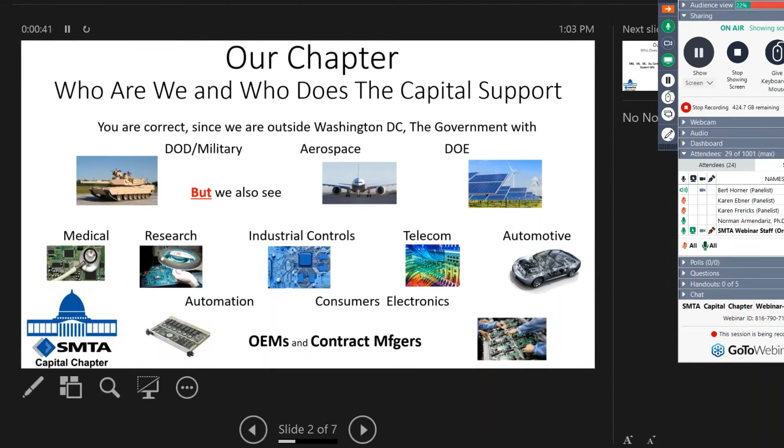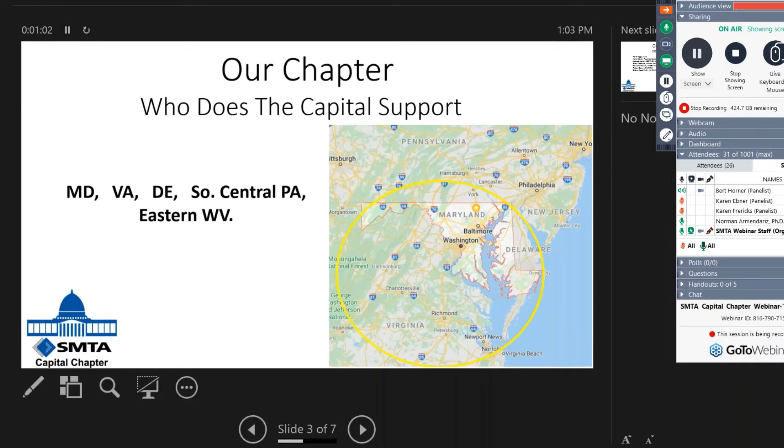Our chapter, who we support, we're basically supporting the Mid-Atlantic area around Baltimore, DC. We get into Virginia, Delaware, Maryland, South Central Pennsylvania, and Eastern West Virginia is our region that we try to support.

We have a great group of officers. I'm blessed to have Katie, Karen, Jessica, Brian, Fernando, Robert, and Banu. It's a nice mix of people that have a ton of experience. I'm really a lucky officer to have 3 past presidents on our staff, a nice mix of suppliers and end users, and professionals that really know the industry and can get a decent speaker. So I am really blessed with that. We have a great sense of pride in the industry and industry insight, and all the officers have a good sense of humor.

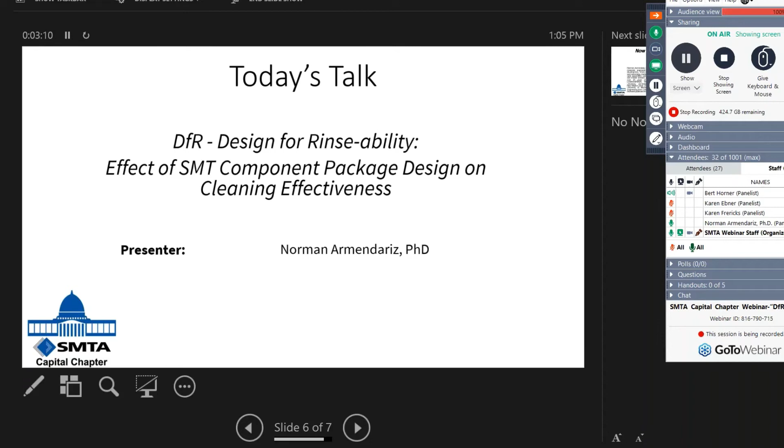A little bit about Norm. Norman Armendariz is an engineering fellow at Raytheon, responsible for material engineering, design, material analysis, process equipment development, micro-analytical metrology development, production support, and technology roadmaps associated with manufacturing of circuit card assemblies used in missile and smart munitions, ground-based radars, and mobile sensors across the U.S. and international sites. Norm has 25 years of industrial experience, has worked for LTV, Lockheed, NASA, Motorola, Intel, Texas Instruments, and American University.

Norm holds an interdisciplinary PhD in chemical engineering from New Mexico State University, holds a MS in material sciences engineering from University of Illinois, and a Bachelor's of Science in Metallurgical Engineering from Colorado State University. He also has 9 U.S. patents and has 29 peer-reviewed publications. So this man really knows his stuff. We're really lucky to have him.

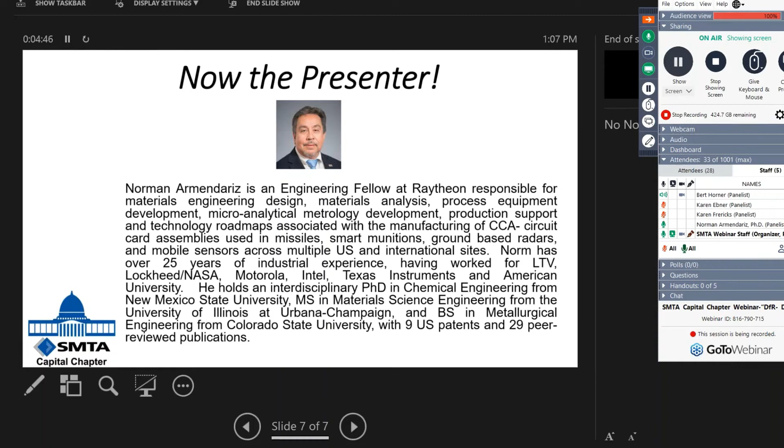Just a quick update for those who may not know. Raytheon merged with United Technologies, so now we're called Raytheon Technologies. And we've also done a number of consolidations internally, and I'm now with the Raytheon Missiles and Defense Group. So, same job, different name, and just different managers.

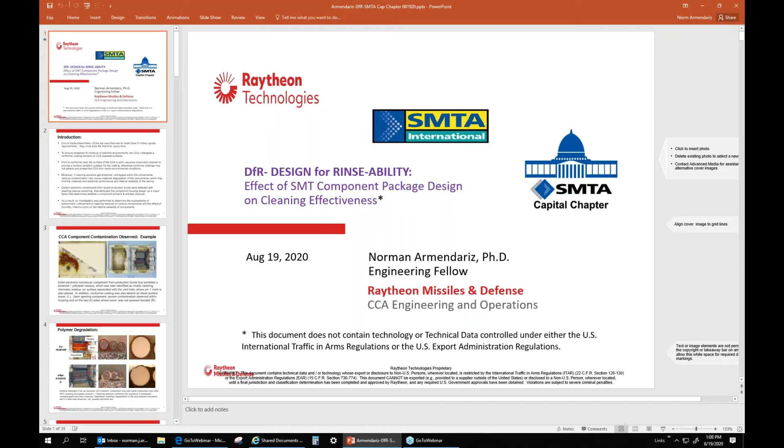This particular presentation, this work was done about 3 years ago, and I presented it at SMTA International. But at that time, we only took it up to the process study. Since then, what's new here is that we've added reliability and thermal cyclic testing, so you can benefit from that if you've already seen this. So let me go ahead and go to screen mode.

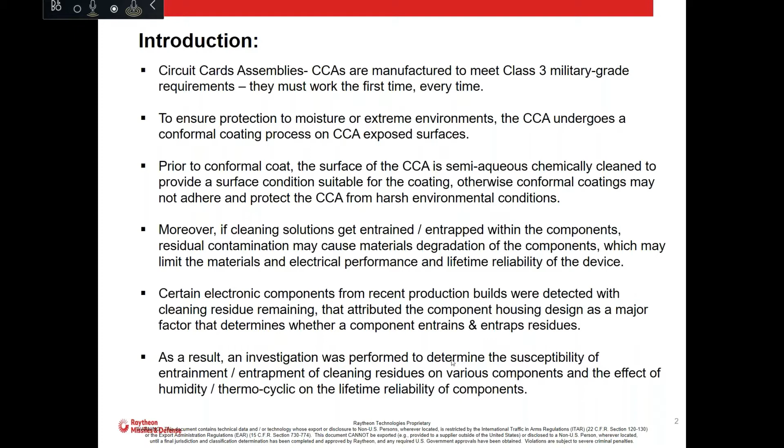So that was kind of a hypothesis, and we wanted to do an investigation, do some experiments to determine, first of all, if this is clean, and if there's certain susceptibility of certain components. And then, as I mentioned, we talked about the efficiency and the effect of the cleaning residue on reliability. All right, so that's kind of where we started.

Okay, took a look at that. Then we did some cross sections here, so you can see the one on the top. I don't know how soon you guys see the presentation, but on the top, it's the as-received part. They didn't do anything, it's a brand new part. This happens to be a little diode with some wire inside of it, wrapping around.

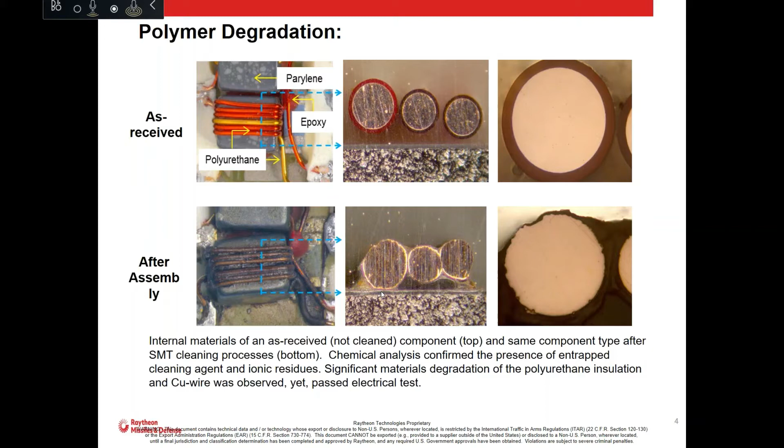Now, the polyurethane in between is still stuck in there, so it still provides some amount of insulation, but you can see that this is on its way to failure. Sometimes you see these things and they're working fine because they're passing an electrical test, but that's why you've got to kind of catch these ahead of time.

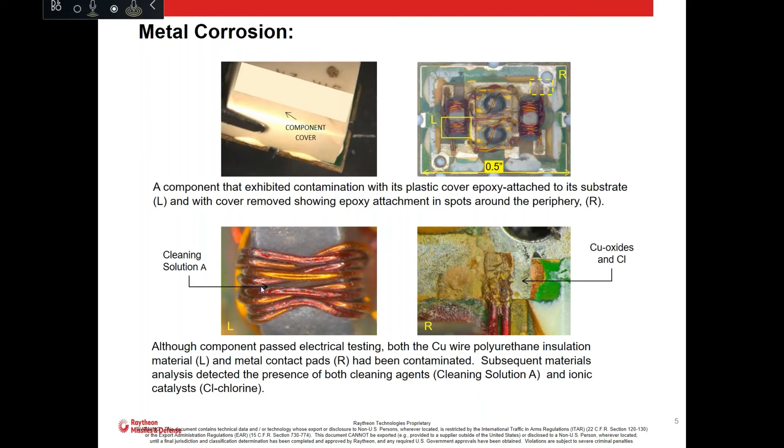We had to form a Tiger team, and there were a lot of components. We had like 500 or 600 on our component list, and that would have really caused us a lot of problems if we had to go look at each and every one.

So we had to quarantine some of these parts, which took us a little while. While we were trying to capture these, we had to do some studies, looking at the most suspected ones and the ones that were failing, saying okay, this family of parts has something funny about it. We need to check these out to see if they're okay.

And if anything was suspected contamination, we submitted it for further study. We also looked at other databases in the products to see if there was a higher risk in the field. So a lot of things were going on at the same time.

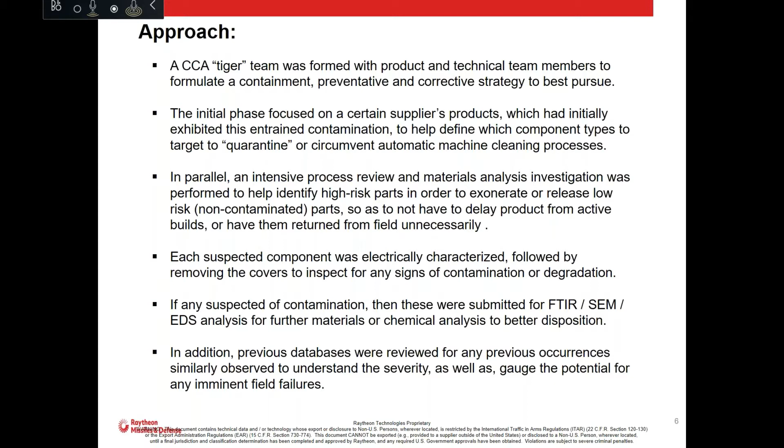So this was kind of our first cut, where we were looking at the contamination rate versus the component type. When we opened some of these suspect devices that were coming in—suspect meaning these were ones being returned, as well as suspected products—we saw there was a whole bunch that were contaminated, and a whole bunch that were not contaminated, all on the right side.

So the hypothesis was, is there something about the ones on the right that are easier to clean? I'm already getting the cat out of the bag here. The ones to the right, marked in green, started thinking, hey, are those more rinsable? Easier to clean, maybe? And why is that? We had to start formulating some kind of idea. What makes them so unique? Why are these not showing any contamination?

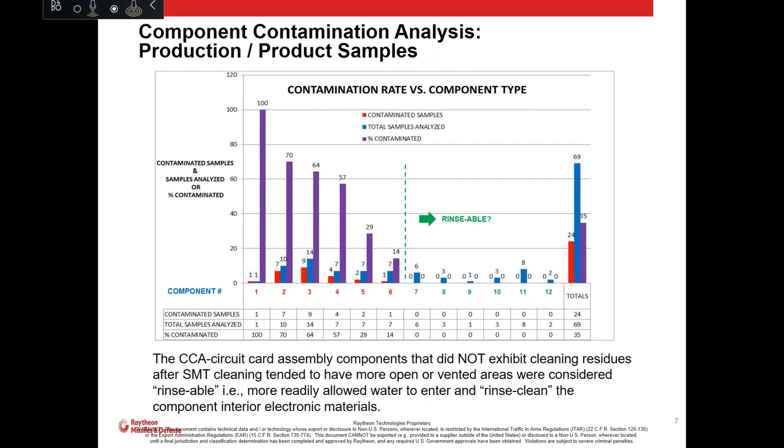So when we started looking at these certain ones that had high rates, we started observing that these component covers—we put them on top, square top, so we can label them on top, and the automatic inspection equipment can see it. You want a flat little top so you can pick it up and image it, make sure the orientation is correct. So it serves that purpose, being able to pick it up and place it, but it also serves to protect the components inside from being hit or damaged physically.

They're usually attached with this epoxy glue around the side to cure it and put the cover on. But it's not a hermetic seal, far from it. There are seams on the opposite sides on this one—they don't put epoxy all around on some of these. Even if you do, that has its own problems, so I'll explain that.

But here's one that has epoxy on two sides, and we opened it up, and where the seam is, we start seeing trails of signatures of contaminants coming in through the seam. Then we looked a little closer, and you can see that the metallic contacts look like they're getting corroded.

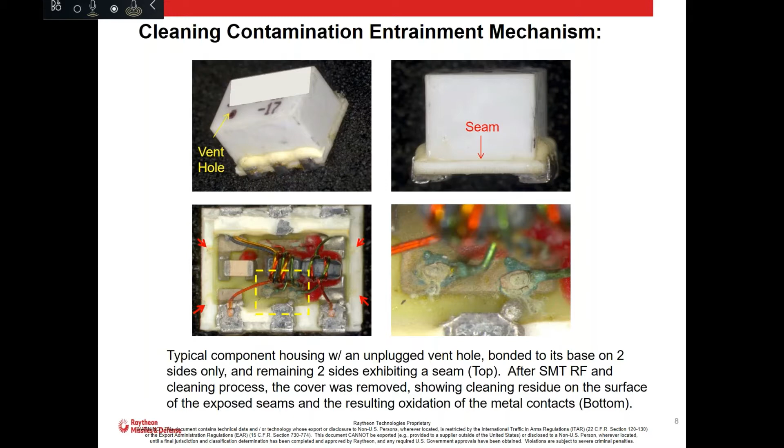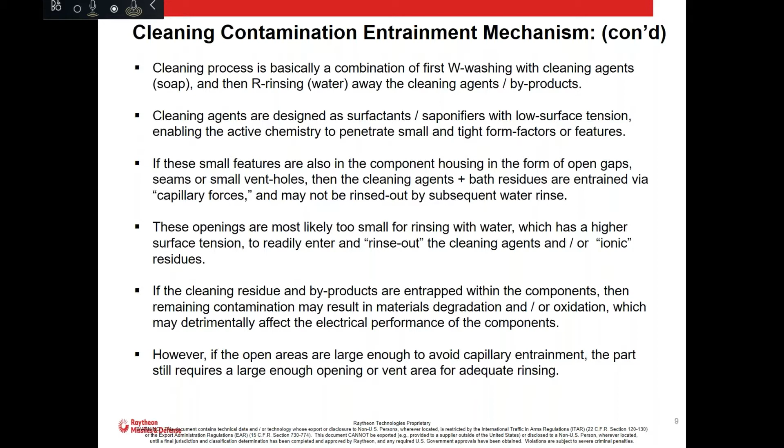So this is the mechanism. Rather than go into reading this, you can read it later. Let me just show you some animation.

There are really two extreme conditions of a component. It could be hermetically sealed with lead glass, whatever—in other words, there's no water or any air that can go in there, very tight seal. We have components like that, very sealed, and they cost you a lot of money. On the opposite side, I have components that are pretty much open, with big windows or big doors, and they're very vented. So those are kind of the extremes.

So when we clean something, we wash it, and we rinse it. Here, not bad—I clean the component with the wash, get rid of the fluxes, and rinse it to take away the dirt. Same thing with the vented open one: I wash inside and out, and then I can also rinse. So those are the two extreme conditions.

But if I have something with very tight vent holes—those little holes, gaps, seams—then what comes into play is capillary forces.

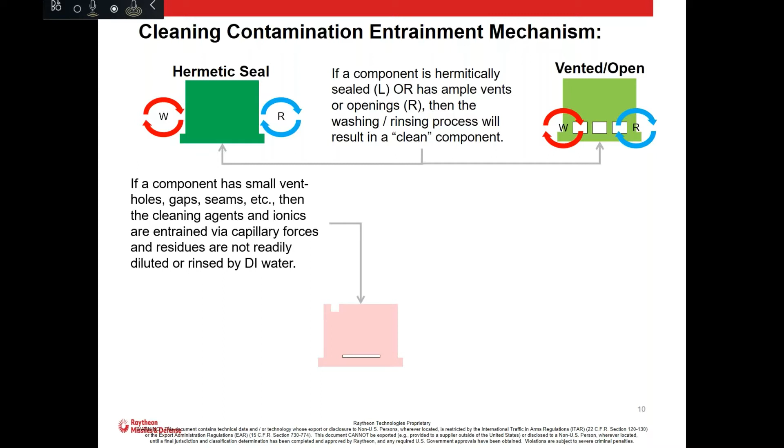So now I'm going to clean this. I'm in a bathtub, if you will, that has bath water, and I have clean agents and ionics, right? Salts and all that I've taken out. I got the soap and the ionics, the dirt, if you will.

And it's an inline cleaner, so when I'm washing, the stuff goes in, and then when I rinse, remember, the wash can go in because it's low permeability, low surface tension, so it gets entrained. But then the water has its own surface tension, as is DI water, and it doesn't penetrate, doesn't entrain, and all it does is just hit the outside. It doesn't go inside.

So what we found is that there's different component housings with different sizes and vents and so forth. We surmise that a minimum size is required for the part to be effectively washed and cleaned, rinsed. So that's why this is titled Designed for Rinsability, not designed for cleanability. It doesn't have to do with cleaning. It has everything to do with rinsing. All right, I want to be able to wash and rinse.

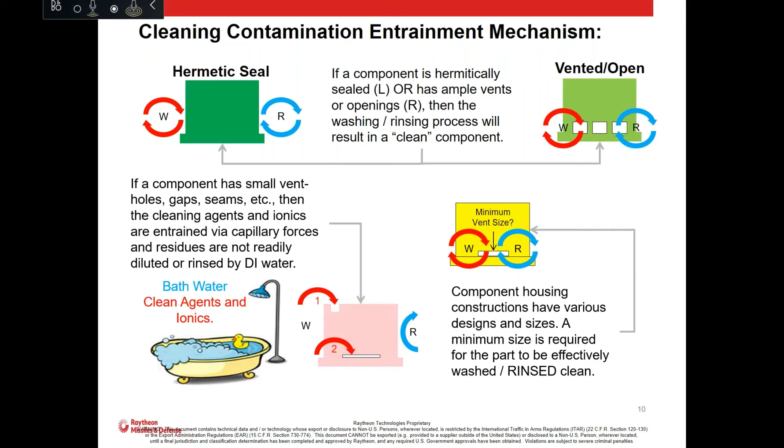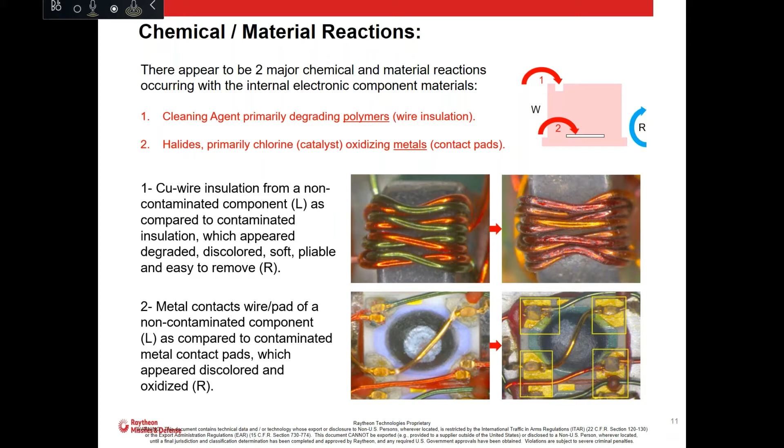Okay, so that was one observation. The second one was that the bath water also has halides, chlorines, all the salts that come off the fluxes and so forth. And the chlorine is acting like an oxidant, as a catalyst. That's why you always have to be careful with chlorine, it's insidious. So here on the left you can see an as-received contact, the wires attached on the base, but on the right, yellow boxes, it started discoloring. Now, again, these are low voltage devices, so they'll probably work to a certain degree, but eventually you're going to see a failure over time, long-term latent failures. If these are high current, even worse. These so happen to be low current.

Okay, so there's all kinds of materials out there that we use. These are kind of representative of what is in our SMT devices, a lot of plastics, polyurethanes, fluoroelastomers, polycarbonates, everything, and metals as well. And there's really three chemistries that we use. We were using chemistry A, and anything that's marked with an X there tells us it's not compatible. This is from our vendors, our vendors tell us, hey, you got to test this stuff.

And for the most part, you can say, hey, as long as I clean it right away and use it really quick, I should be okay. I get into the shower, soap up real quick, and then rinse it off, I'll be okay, right? But if I take a shower and leave that soap on me a long time all day, I'm probably going to start itching, being very itchy that day. So how much time you expose yourself to, for the most part, it's okay if you're in and out real quick.

But if it gets entrained and stuck for a while, that's when you risk contamination or degradation. So the materials on the right tell me that A chemistry is not good for a lot of those, and there's a new chemistry which is much more compatible with more materials. And then C is another one that's used for vapor degreasing, so it also has less risk, you can cover more materials. All right, so you got to be careful what cleaning chemistry you're employing.

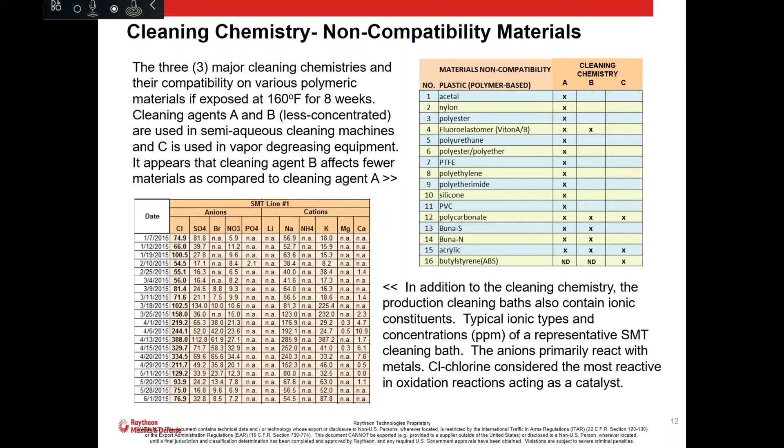The graph below just tells me what my bath water is made out of in terms of anions and cations. So we follow this. This was a study that shows we follow the chlorines, sulfates, bromides, phosphates, and cations. And so the chlorines are the ones we got to watch out for. The anions are the ones that react with metals. The chlorine is very dangerous.

Okay, so how do we go about this? Now that we understand the problem, how do we go about proving this? So what we did, a couple of interns with good eyes, I had them measure 28 different component housing designs from 2 vendors.

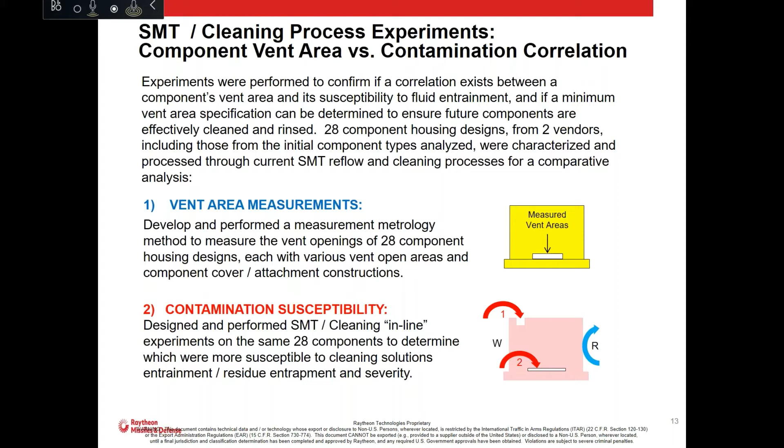And they used a microscope that had area measurements. Then we performed an experiment. We built these same 28 components on a board and ran them through the cleaning machines, then looked at them to see if they had any residue entrapped. So a lot of roll-up-your-sleeves type of work here.

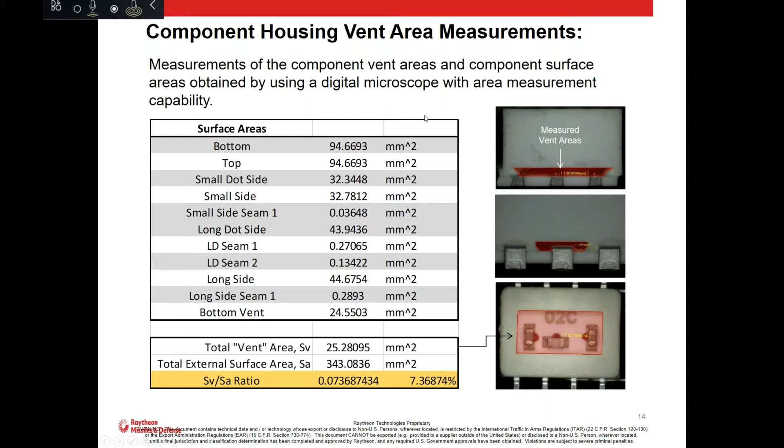For example, we measured the vent area measurements. The vent areas were measured on the side, the little vents. This one had a lot of space underneath, so I just totaled up what area was open, for each component type. That's how we got these vent area measurements, the housing vent area measurements.

So there's the 28 components. I numbered them in order of increasing vent area. They went from zero, where they seemed well sealed, all the way up to 25 millimeters squared, where it was pretty much open all the way. I have an SV ratio here to normalize it, but it tended to track.

We'll look at the purple one. So component 1 was pretty sealed from what we could tell, 1 through 4, and number 27, 28 were pretty open. Okay, so we got that characterized.

And then we put those 28 components on the board, randomly. These are just test boards.

We kept one as a control, and then we processed it. We ran one of them once, two we ran twice, and two we ran three times. Then we baked them afterwards. After they were baked, we opened them up and inspected all of these and ranked them to a qualitative criteria of contamination, to see how dirty they were.

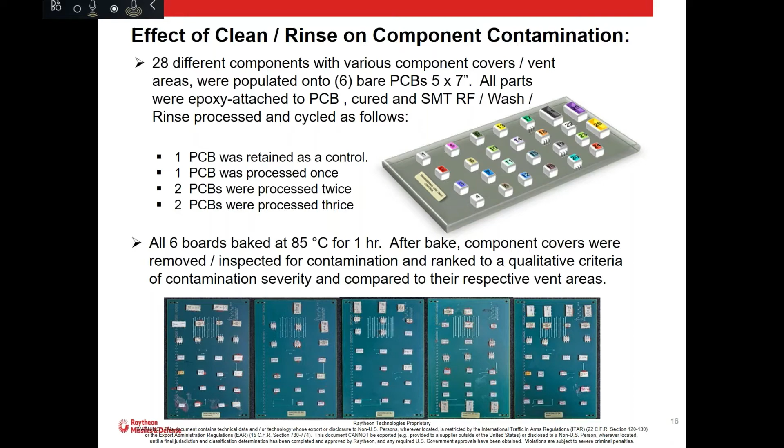So again, we start down here. This is the one that's kind of a control - we didn't wash it. One cycle, we washed and rinsed it. Two, we washed and rinsed it twice. Three, we washed and rinsed it three times. That's kind of the basic experiment, and then we baked it afterwards.

But again, operations would throw me out of there saying, no, I can't be cleaning these things three or four times, I've got other stuff to do. You need to clean these once and be done with it. So, okay.

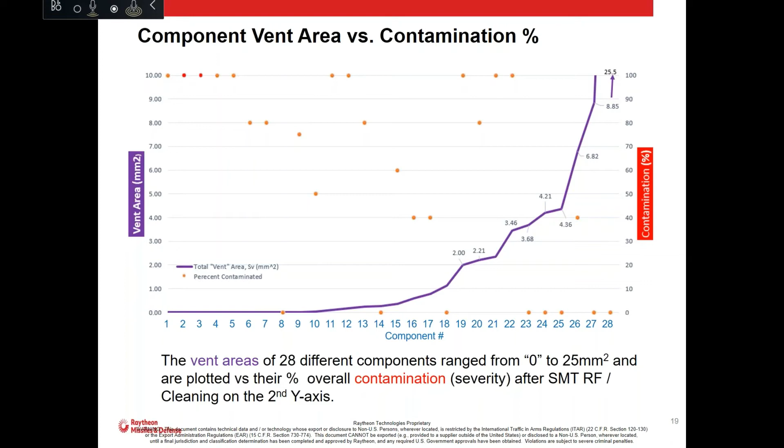So then we had to map this overlay and say, okay, what is it that we're looking at? So over here on the right, we have to go right, into this category C, which is green.

You can see that component there has some big garage door openings there, so it's low risk for entrainment. Okay, so that makes sense - it's way down here with a lot of zeros.

And then this one here that had seams, about 1 to 3 millimeters, it also had some contamination, a lot of contamination.

And then when you come over here to section A, this is one that's sealed all the way. It's ultrasonically sealed. You would think it'd be a good seal, but if you compromise that seal, it would fail with high contamination. So this is what's going on with this one. This is an explanation for it.

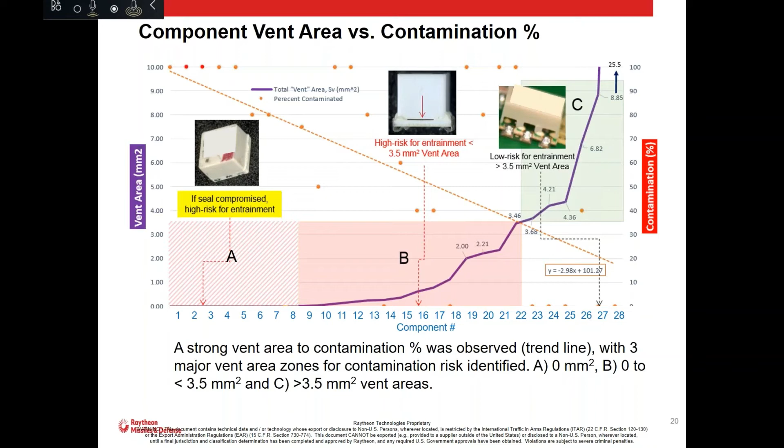So what we observed, now this was an ultrasonic seal welded, started seeing this ooze coming out. And that ooze was the chemistry A based on FTIR. The part was showing the signature, and it matches what our library of that cleaning solution is. Okay, so we know this stuff is coming out. It's going in and it's coming out. Okay, so this is what the mechanism is there.

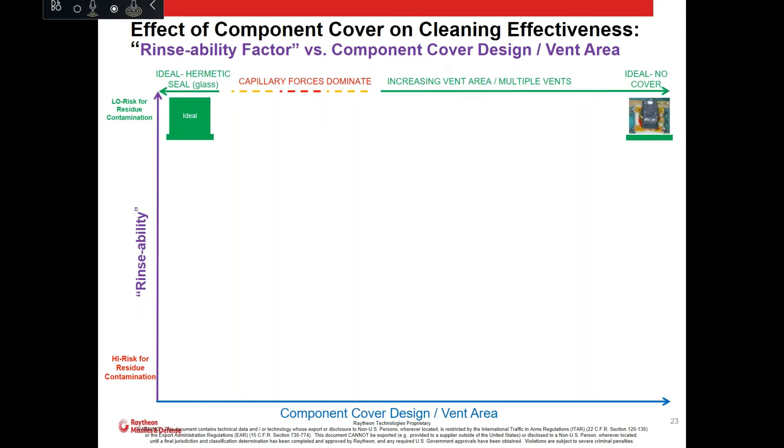It's in the middle, which you got to be careful with. When you have a certain seal of like 1 to 4 mils or openings, like if you open a can of whatever you want to empty, you have to put 2 holes in it to relieve the pressure. Well, here we only got 1 hole, so it'll come in with the heat and capillary, and that is where the capillary forces dominate, and you entrain the cleaning solution, and water can't get in to rinse.

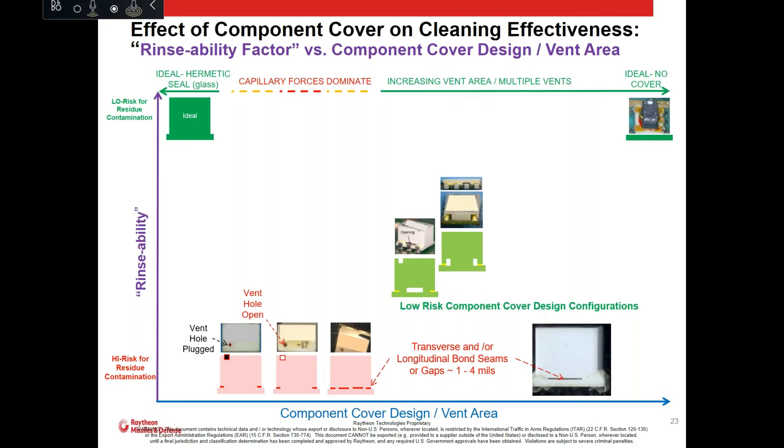Okay, so as I increase that vent area, here are different configurations, and I was just showing you the ones, there's pictures in there, these components. So as I increase that vent area, you end up being aqueous washable. The vendor will tell you, you know what, you can wash this one. And here's one that's open on the bottom, and of course you see the one on the top that doesn't have no cover. So the increasing vent area, the rinsability goes up, you're going up on the y-axis.

Now that one that I was showing you that said, man, that should be a good one, ultrasonic weld, I should be able to wash and rinse this guy and not worry about it. The problem is thermal processing, as I discussed. You heat that up, it'll fracture, and it ends up behaving exactly like one that has a seam. And that's why we saw these components entrain contamination to a high degree.

So you're better off being over here than over here on the left side.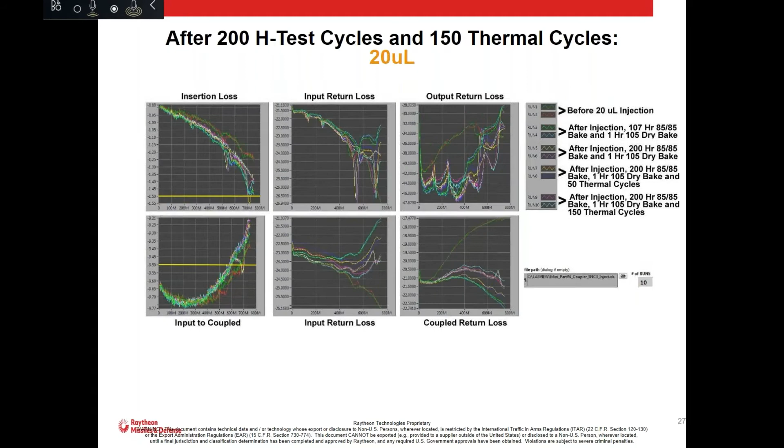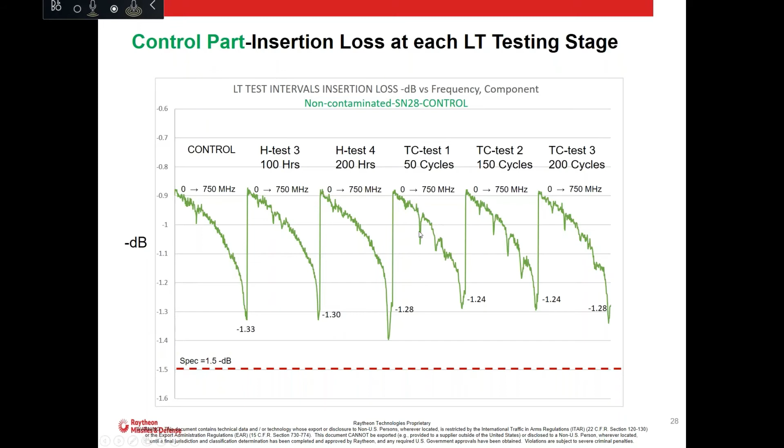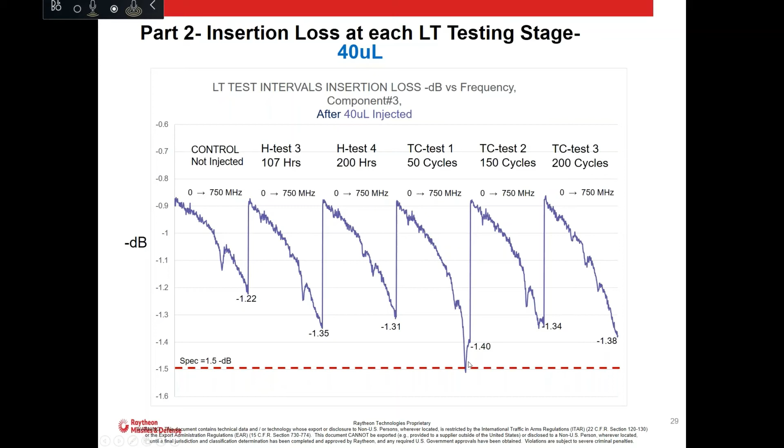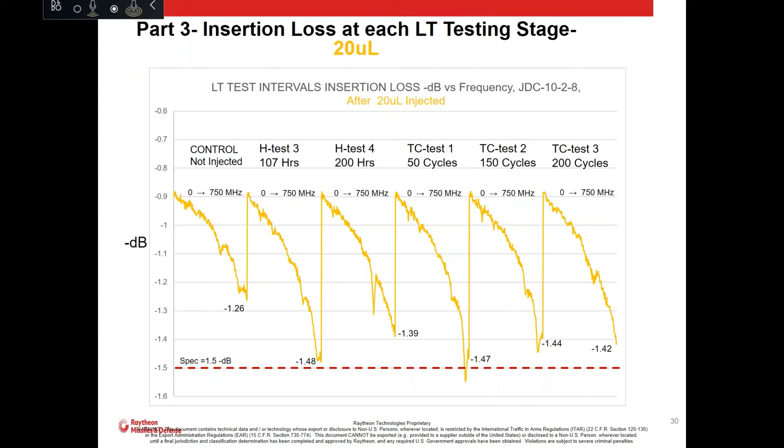Here's the control part. The spec was 1.5, and we saw 1.3, 1.28. As we went through every leg, we tested it to see if it would degrade. The one with 40 microliters of solution dipped below slightly, and 20 microliters also dipped below a little bit. On average it's still in spec, but this one was reading minus 1.47. They were just under spec of 1.5 - we're pushing it.

So essentially what we saw here is a summary that, based on this, we saw about a 12 to 13% degradation, still within spec, so you can grade these. Again, this is kind of a worst case, so you got to be careful.

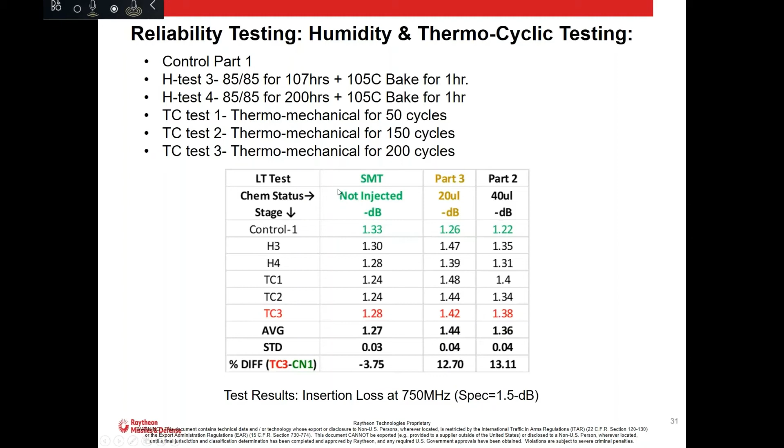So in summary, the component housing construction was the major factor. We saw a definite relationship between the vent area and the contaminant drain. For those that were very well bonded, the thermal processing effects can compromise the bonding interface seals. So don't be fooled - putting more epoxy around there doesn't mean the more the better.

The humidity testing and thermal cycle testing showed that you can get discoloration, degradation about 10 to 15%. But again, it ended within specification, at least this time. So basically, certain components have more rinsability than others.

So we've already implemented some guidelines here. This is kind of the recommendations. You gotta identify the materials used in there, make sure your cleaning chemistries are understood - you may want to go to a less aggressive cleaning solution, what we did, and better target what we want to clean. And again, evaluate the constructions for rinsability and the covers.

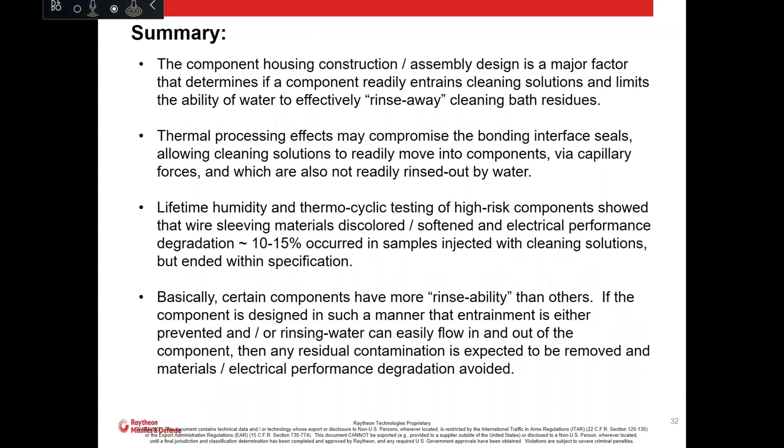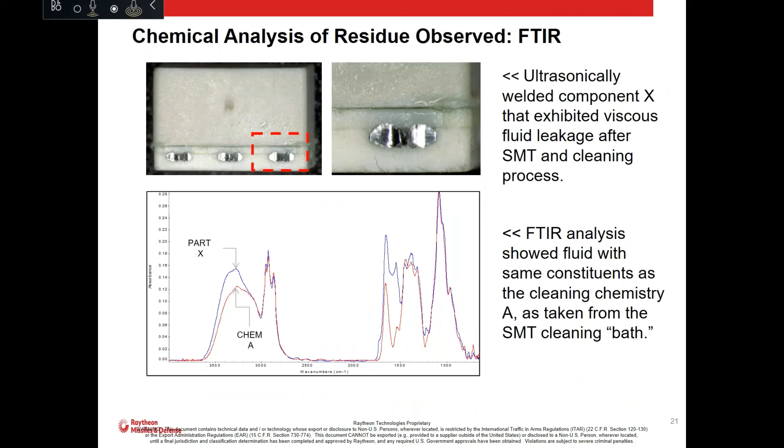Okay, so that's kind of what the rules are. There's guidelines, but you need to base yourself on fundamentals and ask what do I look for? Try to get back to...

You want to make sure you look at your components. You want to make sure you've got a clean solution. It's designed for your process, not clean, whatever. And then evaluate the component constructions. Tell your engineers, your designers, and it takes a while, right?

But on our designs and so forth, that's a question that's asked: is your component aqueous washable? And then they ask the vendor. Sometimes the vendor says yes, sometimes the vendor says silent, we don't know. And that's when you have to ask, how do I assess this before I build it?

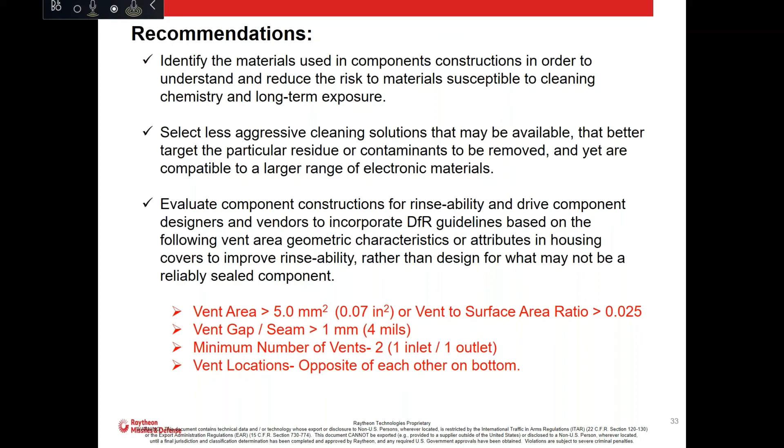The next question is, for a given vent area, how important is the aspect ratio of the opening? It didn't seem to matter. You want to make sure the height wasn't more than 1 or 2 mils, but here you see the gap of 1 to 4 mils. If it was very long, with a very long aspect ratio, it would still entrain it, because the capillary forces don't really look at that area.

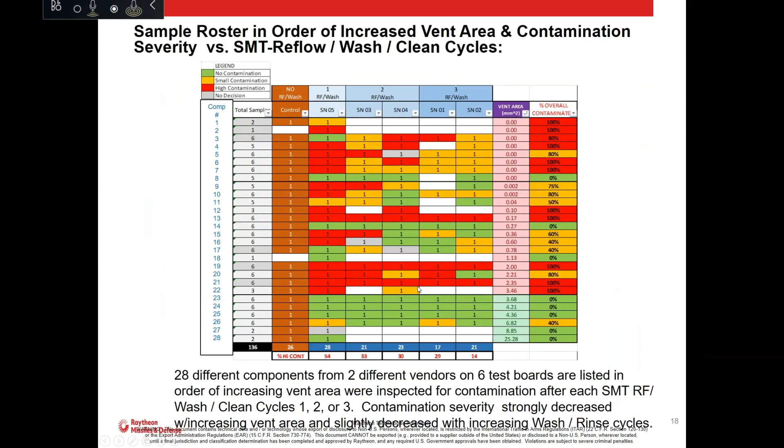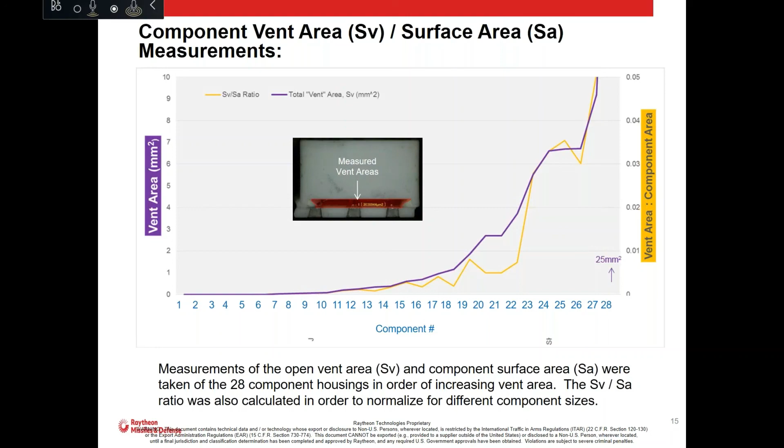But what we tried to do, because we didn't think about that, is try to plot the vent area to the surface area. In other words, I had a real big component, a big house, a big wall on the outside, and is there a relationship? We didn't really see it. It seemed to be the same, but again, most of these components are in the 1 to 2 centimeter by centimeter range, or half a centimeter up to 1 millimeter.

I think the main thing we saw was, what were the openings? You can get yourself into a rat hole trying to figure out aspect ratio and all that, but if you look at designs past 5 millimeter squares, that's what you need to focus on. If you have big openings that can be easily rinsed, that the water can get in there, then you'll be safe. If you want to play with aspect ratios down here, you're probably risking it.

The next question is, have you performed the same type of analysis on vented BGAs? Any recommendations on washing assemblies with vented BGAs? Well, many of these started before we got this particular project, and I don't know if the packages are BGAs, but there's some components out there - I think the one I customized, Xilinx makes them, and we had worked with them. They had a vent hole on their, we'll call it a BGA.